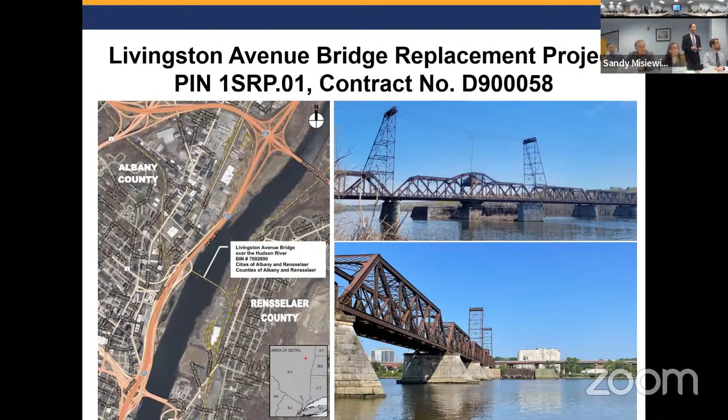Just a little orientation here. This is kind of a view if you're up in the Corning Tower looking down towards the bridge. On the Rensselaer side, immediately adjacent to the bridge is the Amtrak facility. You've got the Livingston Avenue Bridge crossing the river, and then on the Albany side, we've got quite a bit going on - 787, the Mohawk Hudson Bike Hike Trail, the Corning Preserve, Quay Street, Water Street, Center Street, the Skyway, and the lovely Central Warehouse.

As far... another conversation. That's a whole separate conversation.

As far as the existing bridge goes, it was built for New York Central Railroad back in the early 1900s. It actually uses abutments and piers from the Civil War era, 1860s. As I mentioned, there's the two steel frame towers, those are about 152 feet above mean high water, flanking the swing span. So those really draw your eye. Railroad facts: CSX owns the bridge, Amtrak controls it under a long-term lease, and they also operate it in terms of maintenance and everything else that goes with that. And it does serve both passenger and freight rail.

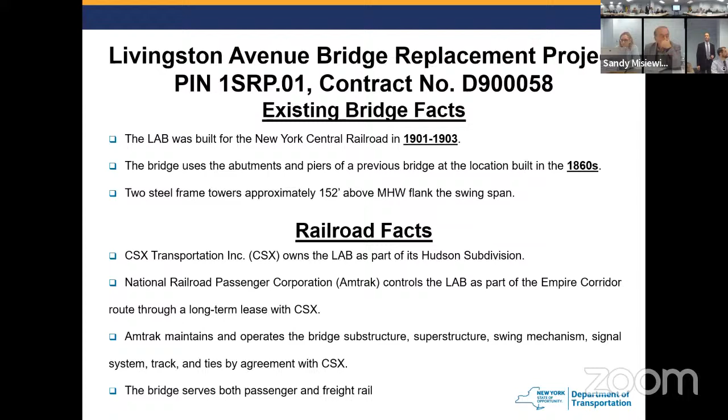As far as the scope of the project, we're replacing the bridge approximately 50 feet south of the existing one. It's going to be a vertical lift span rather than a swing span. On the Rensselaer side, we're realigning some of the wye tracks to accommodate that alignment shift. Over in Albany, there's also a minor alignment change, and we'll be tying in right near the central warehouse.

As far as the shared use path, there's going to be one on the south side of the bridge. It will basically connect from the Skyway over to the trail system that's going to be built as part of this project over in Rensselaer.

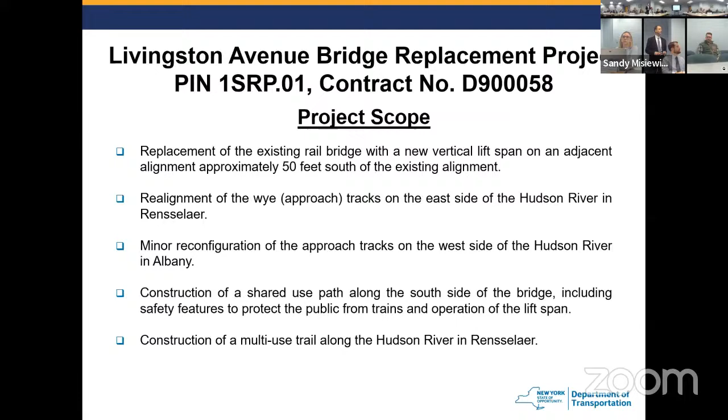What else we got here? So going back to this view, I'm just going to walk through some of the highlights.

The red is essentially the new alignment. You can see it's just south of the existing bridge. You can see the wye track over on the right side, over on Rensselaer. The limits of those lines are pretty much the limit of the work for the railroad at both ends. And over on the left edge of the screen, you can see where it ties in right by the central warehouse.

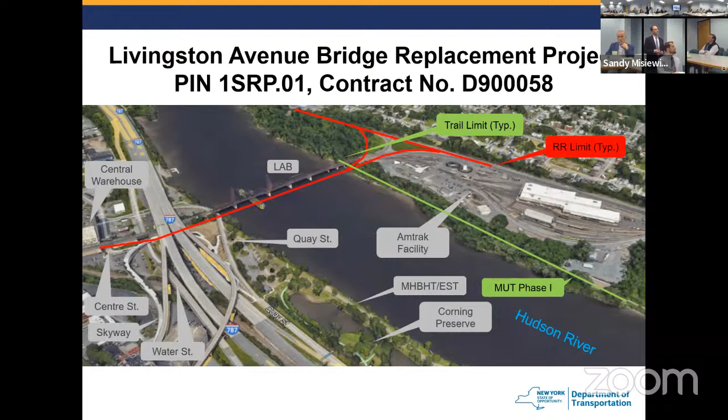This green line represents the portion of the multi-use trail that will be constructed as part of this project, basically tying in at the south end where the existing way currently ends down at Delay's Landing. Then up to the north, we'll just be going just north of the existing bridge for now.

And then we have the shared use path that's going to be built on the south side of the new bridge, tying in at the Skyway on the left, in Albany. Basically the shared use path will go over to the multi-use trail in Rensselaer and then swing around to tie into or tee into the multi-use trail.

The second phase of the multi-use trail would be constructed in a later phase.

These are some renderings. They're a bit dated at this point, but these were the renderings used during the public hearing. So this is a bird's eye view from Rensselaer looking over towards Albany. You can see the shared use path on the south side of the new bridge, how it goes over the multi-use trail and swings around. It'll tie in just off to the screen to the left. And obviously you can see the towers for the lift span.

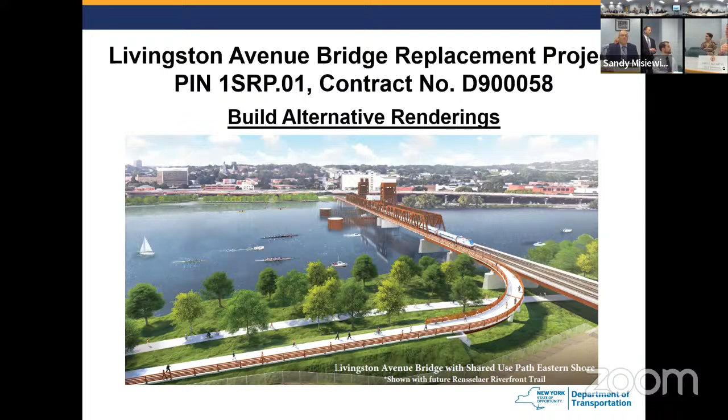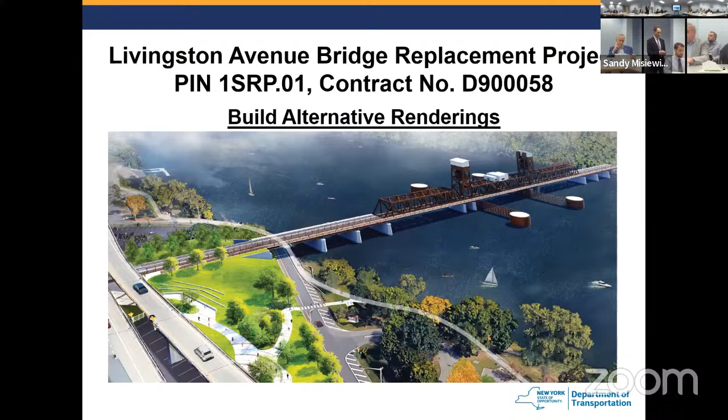This is a view from more of the Albany side, highlighting the same features. The shared use path will tie into the Skyway - I can't really point to it, but it'll tie in just under 787 there. And you can obviously see the span that's going to be the lift span.

Here's the lift span. Of note here is, on top of the lift span is a mechanical house - that's where all the mechanisms for the lift structure will be. And then you've got the towers on either side. Obviously, those towers have to be strong enough to hold that bridge up and lift it up and down.

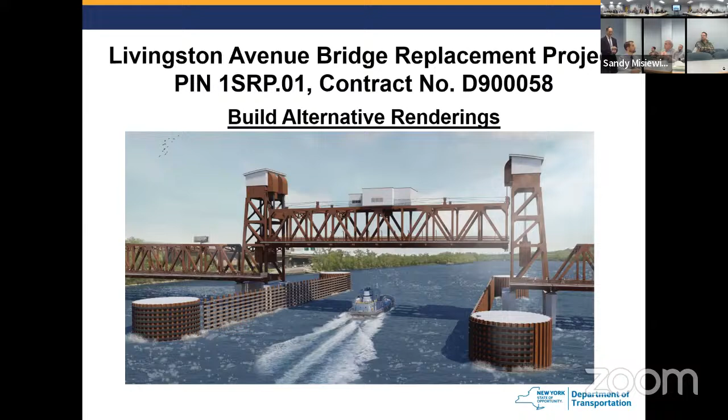I will note the fendering system in the water here is pretty substantial - it probably will not look like that. During the procurement, all the teams that were pursuing this did want to incorporate stronger piers that could take any impacts, so we are going to be scaling that down quite a bit. You won't have those big clunky concrete piers at either end with the funny looking fencing, if you will.

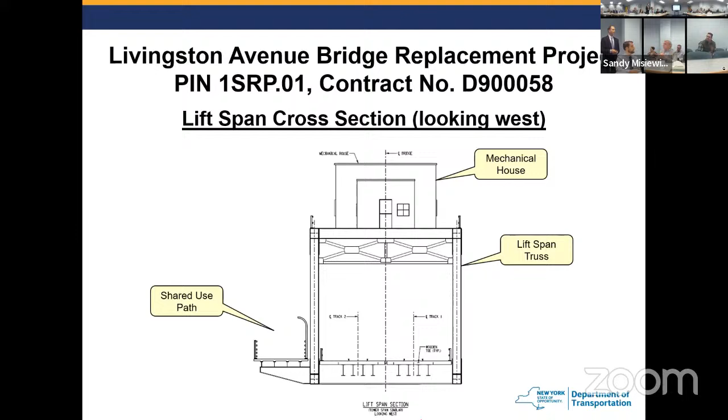As far as a cross section, this is basically from Rensselaer looking towards Albany. You've got the shared use path on the left or south side, it shows the mechanical house up on the lift span, and it will have 2 tracks down the center.

This is just a slide showing the internal workings in the mechanical house. It shows all the mechanical gearing and the electrical and communication systems that are going to be required for operating that. That's a whole separate conversation or PowerPoint to get into all the ins and outs of that system, but it's a pretty complicated system.

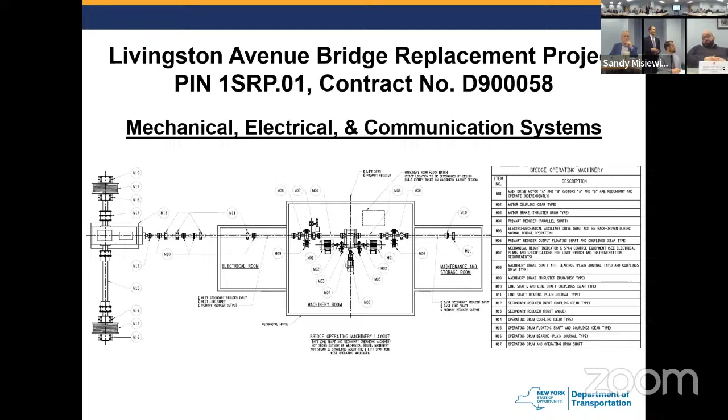As far as where we are currently, this is our procurement schedule. We're pretty far through that at this point - we're actually at the point where we're close to award. We've been through the entire procurement, we've worked with 3 teams that were shortlisted to pursue the project, and we are getting close to the award.

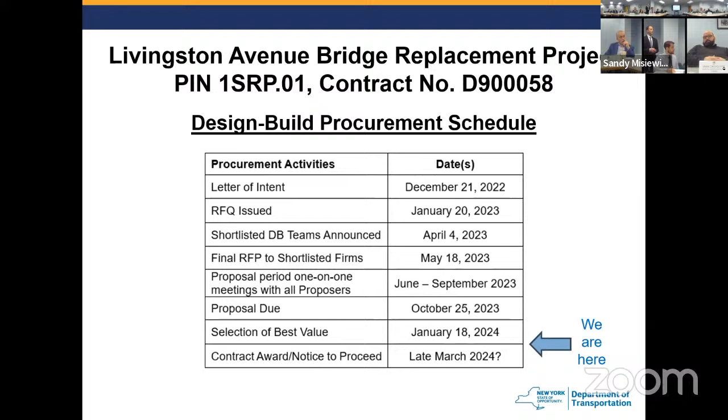These bullets just kind of highlight a likely bridge schedule, just to give you an idea of timing. We do have a pretty intense environmental restriction on this project. We can't work in the water from March to October, so we have to find some workarounds.

One of those is in-water borings done in February, which will guide the design team in their final design. In March, there will be some tree removals over on the Rensselaer side within the project limits. And then the design builder would initiate their mobilization, getting additional studies and testing needed for final design, and working on their permitting.

By summer or fall, that's when we'll actually start seeing some construction. They would most likely get going on their abutments for the new bridge at that point in time. In October, when the environmental restriction gets lifted, that restriction is for the sturgeon—short nose and Atlantic sturgeon that come all the way up to this area. It's basically spawning season, and we have to be very careful about what's happening in the river.

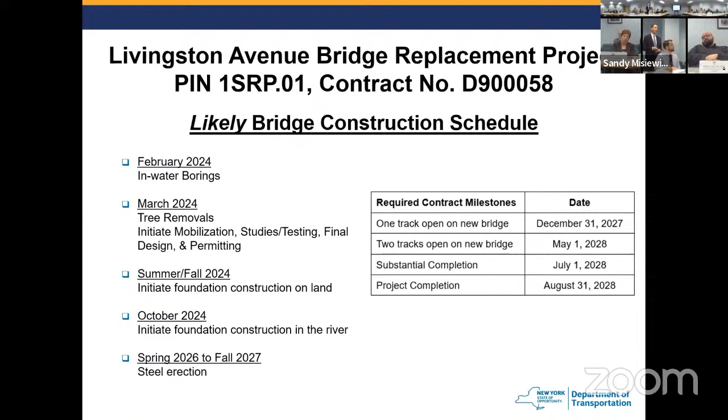As far as maintaining traffic, there's not a lot of impacts here because most of the work is in the river and on railroad property. But we do have some local streets—Quay, Water, and Centre Street. Any closures of those roads would be limited to nighttime work, and they'd obviously have to have appropriate detours in place.

As far as the trail in Albany, there's a provision in the contract that it has to remain open at all times, and can only be closed when the adjacent Quay Street is closed and an accessible detour is provided. So we made it a very critical aspect of the contract that the trail should remain intact throughout construction.

We've worked with the Coast Guard and are allowing a 2-week closure of the entire navigational channel. That will likely occur in October, and that's going to be primarily when they are lifting in the final truss segment for the bridge and removing the existing truss segment at the location of the new lift span.

So we're giving them 2 weeks to lift a segment in and take a segment out. It's a very strategic and critical move, but we have to get that done at a certain point in time. Then there's a temporary channel allowed for 30 days max for demolition of the existing pier in the middle of the river, which is also the location of the new lift span.

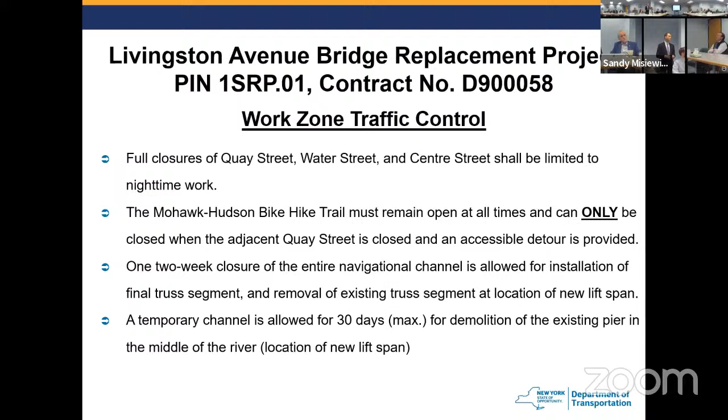That's all I have. Any questions?

Actually, I do. I'm looking at putting a trail between the cities of Troy and Rensselaer, so what is the timing for the pedestrian thing? Is that about 2028, or earlier? We have to work with the city on finalizing the details for that northern phase of the trail, but the trail we're building will be done in that 2028 timeframe.

We understand the city will proceed as soon as the footprint's free again, and I understand they intend to let phase 2 of their project to get to the Hilton boat launch. That's how I understand it too—they're going to follow as fast as they can. The earliest that could potentially happen is 2028, though it'll take a while since it's a bigger segment, about 3 miles.

Have you decided where the access is going to be on the Tracy Street access to get into the bridge, or through the Amtrak road? So both. We are acquiring a couple temporary easements to the north. There used to be a power line that ran down from Tracy Street toward the bridge. That's gonna be an access way for the contractor, but they'll also be able to use the Amtrak property to access, so we're gonna have a bit of a staging area.

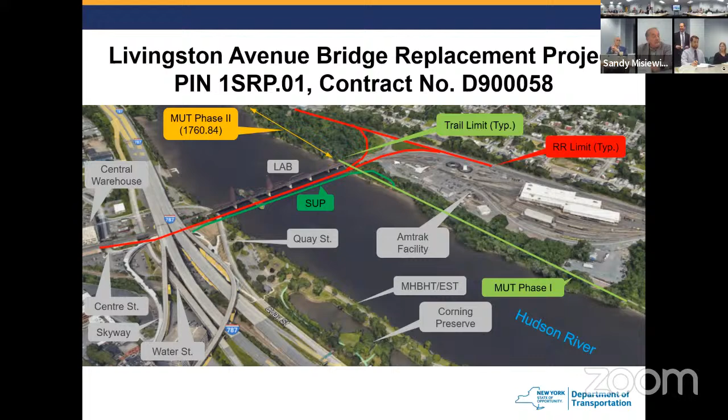Yeah, there's a few of them there, right? Yeah, absolutely. But we're gonna be in good shape by the end of this month to start construction. Okay, thank you. Thanks. Sure.

Long awaited. That's all I can say is, 20 years ago, I was at this table and did a press conference with Senator Schumer trying to get this project along. I worked for Amtrak for over 41 years in safety, and that bridge has always been a concern, not only for me as an employee when I worked for Amtrak, but also as somebody who's represented the city of Rensselaer.

That Livingston Avenue Bridge is still a walkway, whether we like it or not. They took away the walkway on the bridge, but people now just walk down the tracks. I didn't see the philosophy in that, but that's what they did, and they still do it today. So it was long overdue, and I look forward to having that branch to reach over to the Corning Preserve and be able to transfer back and forth for both communities.

I think it'd be very good for the capital region. Yeah, I think this is gonna create a regional attraction. I agree. And the state, the New York State Department of Transportation—I want to give kudos to them—had the foresight to realize that the Skyway was just a link in a chain of what could be. Being able to have amenities on both sides and the opportunity to do things together, I think this is a good thing.

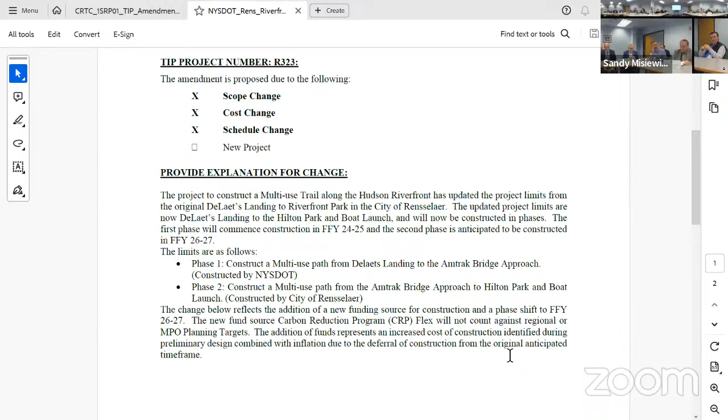So it's a mutually beneficial amendment here, progressing their half of the trail. Are there any questions regarding this?

Greg, just to add to what had been said, traditionally we combine projects at letting all the time, and they'll go out under one bid. But because the environmental processes were different, the Livingston Ave Bridge was done under FRA rules, and that project was done under federal highway provisions.

So technically, that's why there's two separate amendments here for two different projects. They're going to be under the same construction contract, but that's why they're still a little bit different than we had traditionally done, where we would just put them under one pin. It's because they took two different environmental paths for each project that they're still distinct, which is what we're presenting here. Thank you.

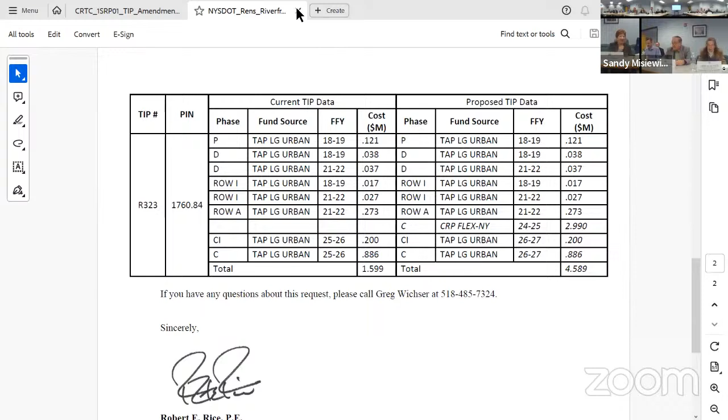Can I have a motion to approve the amendment? I'd like to make that motion, please. I think you're gonna second it. I think it's only appropriate. Any further discussion? All in favor, say aye. Aye. Any opposed? Great, okay.

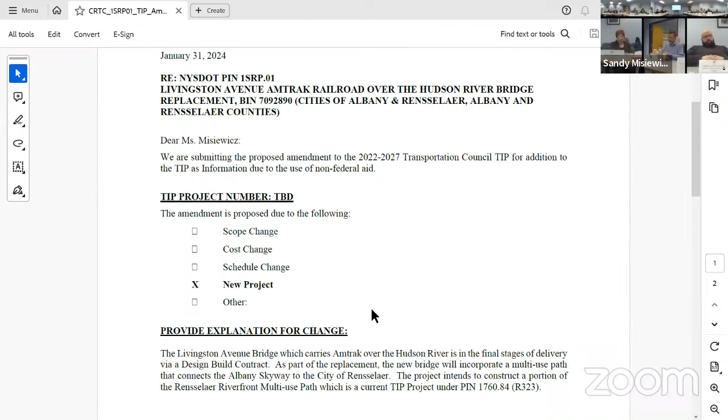All right, second amendment is the big one, the Livingston Avenue Bridge itself. We are putting this forward using state funds, to be added to the TIP as an illustrative project, long identified in the long range plan. So we're bringing it forward with state funds to add it to the TIP of the capital district, showing all of this together as part of the equation to have all this move forward.

The other action is to show the Livingston Avenue Bridge project fully funded here and moving forward to construction, because as you saw in the presentation, we're eager to award.

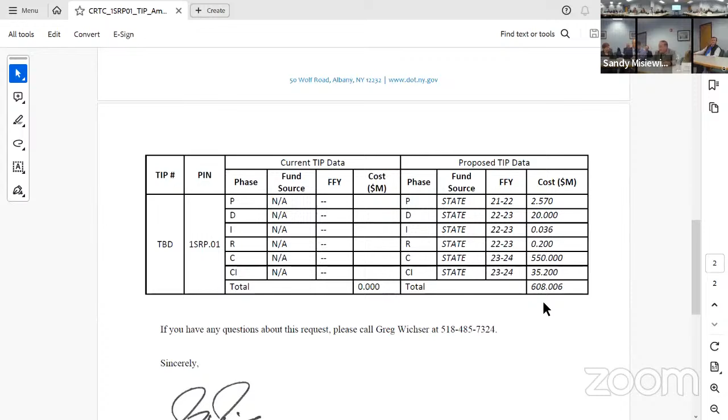I'd like to make a motion to award, to make the Livingston Avenue Bridge part of the TIP project as announced. I'd like to second it. I love that, thank you. All right, any further discussion? All in favor? Aye. Any opposed?

Well, with that, that really is our agenda. There's some other notes, obviously, but if anybody has anything else they would like to share while we're all gathered today? No, I would just like to thank the CDTC, obviously.

Legacy—I've been here for a while, but for all the hard work, I've been here for a number of years and I've always brought this subject up, and there was something that I think needed to be done. We carried that $50,000 around for the original design forever, but we never saw anything come from it.

Now we're seeing something come from it, and I'd like to thank your pursuit as well as the whole organization and the collaboration between Albany and Rensselaer in order to make this happen. Thank you. We appreciate the special meeting to get this over the plate with some urgency. We've explored various ways to get federal aid on here, and this solves all the problems, and we appreciate the special meeting. Thank everybody.